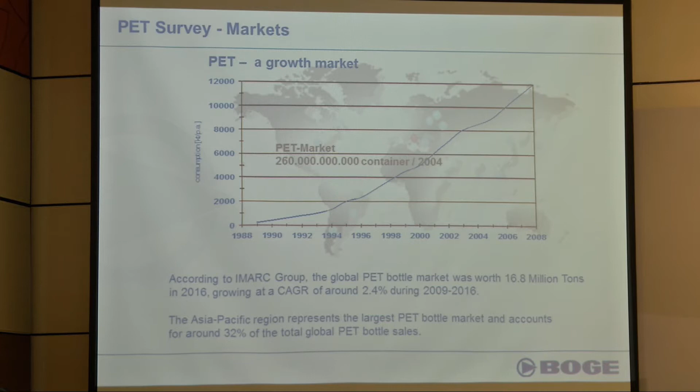What business is PET? Most of you are in the PET industry or supplying material and so on, and it is growing. The compressed air demand for this industry is also growing by 2.4% from 2009 to 2016. The best part is 32% of the total global PET business is from Asia Pacific, so that's where we are - a growing and developing market for PET requirements in Asia Pacific.

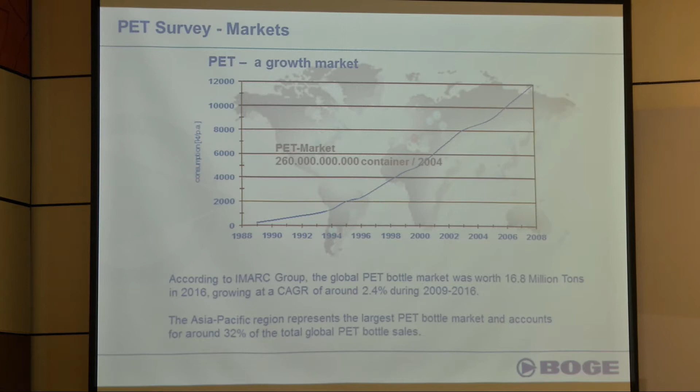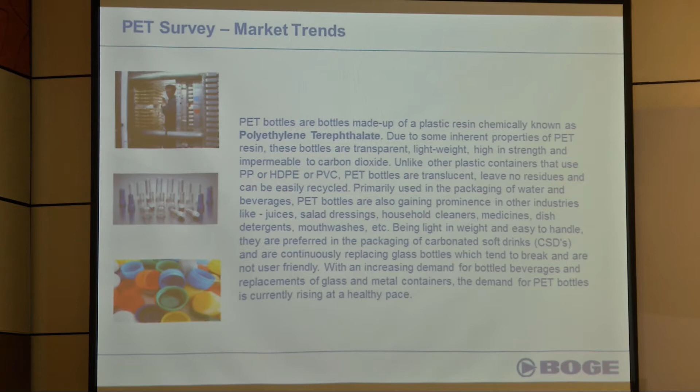Mainly PET bottles are used for all kinds of packaging, like fruit drinks, other soft drinks, beverages, some chemicals, and cooking liquids, because PET bottles are lighter, easy to handle, and easy to recycle. So it's a growing and demanding market.

When it comes to manufacturing, there are a lot of PET bottle manufacturing processes. You get single stage machines, where you manufacture the preform, then blow the bottle, and then it goes to the filling all the way in one line. So this is one kind of industry that you have.

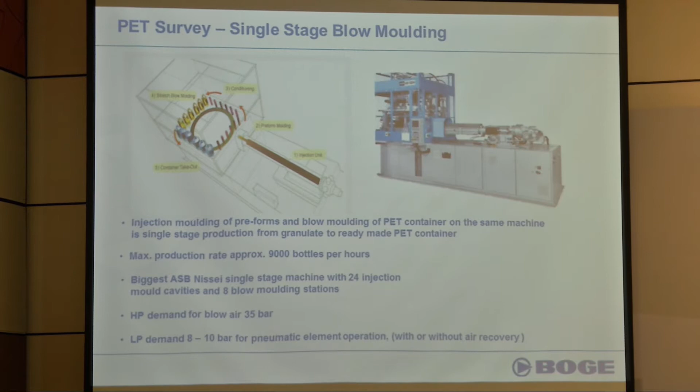Some of the big manufacturers of such machines are ASB and Nissei and so on, and you can go up to about 9,000 bottles per hour of manufacturing. This needs high pressure compressed air of 35 bar basically, and for the low pressure, there is a low pressure requirement as well for the pneumatics to work, so that your plant will do the job.

There are two kinds of pressure applications, and for several years, the 40 bar or 35 bar pressure has just been blown and sent out to the atmosphere. But with the growing demand of energy bills rising up, there was a requirement for recovery of this energy or the compressed air that is blown out to the atmosphere.

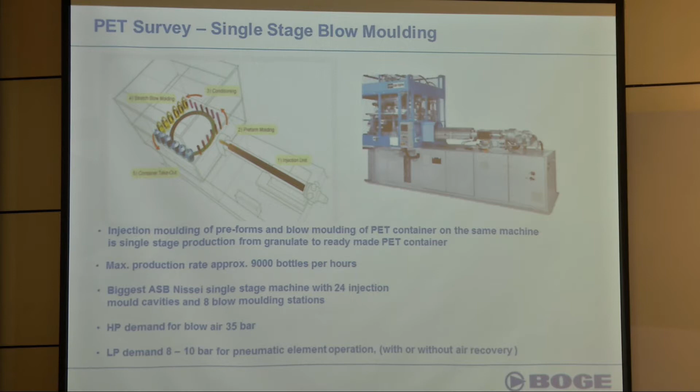So since 5-6 years back, manufacturers of these machines started building compressed air recovery systems - ASR, ARS you call it.

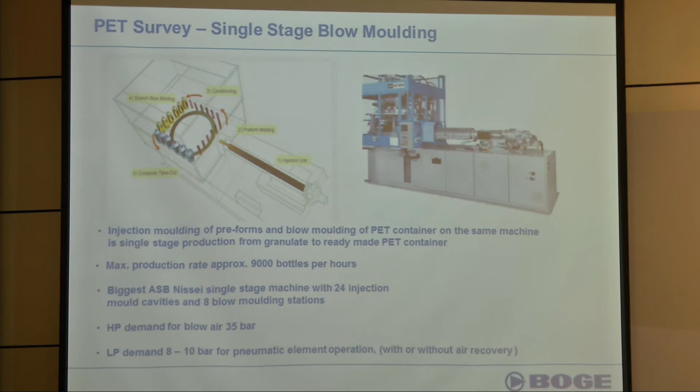What you do is, when you have a rotary system or a linear system, it doesn't matter - the final product is blown at 35 bar, but that energy, the compressed air that is blown at 35 bar, is recovered to do a pre-blowing to the previous bottle that is coming in the line. I hope you can understand it because you recover the... I don't have a slide to show that, but maybe on the next slide I will show you.

This is the final blowing, but it takes the pressure back to the bottle that was blown before, at a lower pressure first, and that air again is used to blow the bottle before that at a lower pressure again. So the final product is blown in 3 stages.

So you can recover the compressed air without sending it back to the atmosphere. Then after the 3rd stage, the 4th level, it goes back to another tank and is used as pneumatic air for 7-8 bar requirement. So this is a better way of blowing bottles or using compressed air rather than sending it outside after you blow at 35 bar. There are machines now built with air recovery systems, which you need to look at when deciding on a plant.

What we would also recommend is the conventional way of blowing PET bottles was using a big compressor which from zero sucks atmospheric air and pressurizes it to 40 bar, and you use that compressed air to blow the bottles.

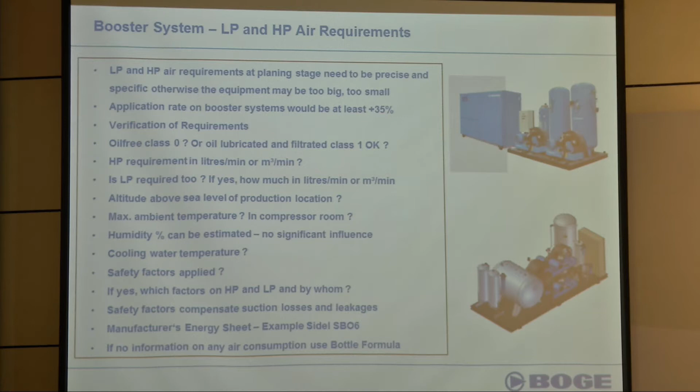But the general norm is, when you start manufacturing bottles, you are not going to manufacture the same kind of bottles every day or the same size. You will keep changing the bottle volume, and you will also change the speed depending on your demand. So when you have a variation in compressed air requirement, it makes no sense to have a very big machine that produces the maximum at one time but is only utilized 50% or 70%.

So it's better to have a modular system to produce bottles rather than one big system that does everything at once. So we came out with a new concept where you can have a modular type system, where compressors have a low pressure system, then it will be boosted to whatever pressure you need.

Whether you want 40 bar, 35 bar, or 26 bar, depending on the kind of bottle you blow and the design you need, you can blow it from 22 bar all the way to 35 bar pressures. So you can have a pre-pressure compressor system, then a booster system where you can boost it to whatever pressure you need.

So before you go into a production plant, as part of the design, you need to ask yourself questions like: what is the low pressure requirement, and whether you want single stage or two stage blowing.

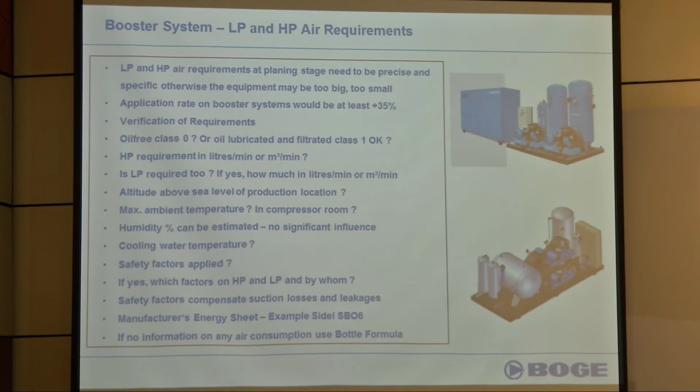Then, what would be the air requirements? This is the biggest question, because generally a lot of consultants or bottle manufacturers will say, I need oil-free air. When you say oil-free, you have to have a benchmark for what you mean by oil-free. Because there's technically oil-free compressed air, or you can get an oil-free compressor system. An oil-free compressor system only means that during the compression stage, you don't use oil.

But the question is, what is happening here in the atmosphere? Because in every plant, you have generators or injection molding machines or other machines producing hydrocarbons going into the atmosphere, like even your vehicles, and in places like Bangkok or around Bangkok, a lot of cars are emitting hydrocarbons into the atmosphere, unburned fuel. So all this is in the atmosphere.

So if you have 1 milligram of hydrocarbons in the atmosphere, when you compress it to 35 bar, that means you are putting 36 meter cubes of ambient air into a tank of 1 meter cube, for example. So if you have 1 milligram of hydrocarbons in atmosphere in a 1 meter cube, in compressed air you will have 36 milligrams of hydrocarbons. So it doesn't matter whether the oil came from the compressor or not, because you already had it in the atmosphere. That's very important: although you have an oil-free compressor, it doesn't mean your product won't get contaminated. So you need to look at the whole process.

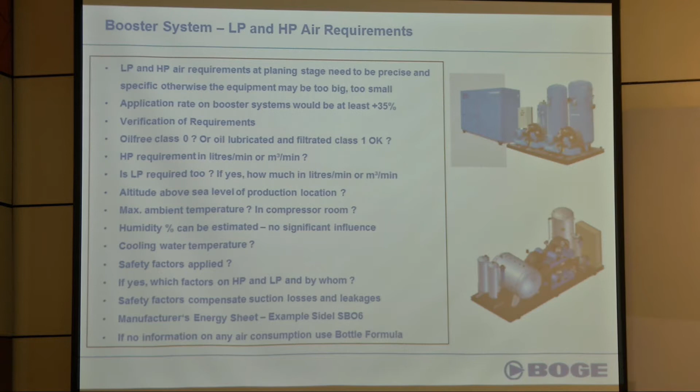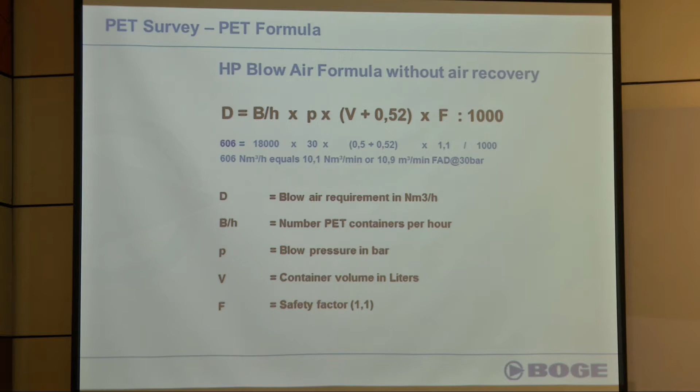If you don't have the equation, here we have the equation that all the bottling manufacturers use, so you can use this calculation to determine the compressed air requirement. You can also see there is a safety factor that we have put, because in case of a preform burst, you're going to lose compressed air, and in case of leakages in the plant, if you don't maintain it, you lose compressed air. So to compensate for all these factors, you need to add at least an additional 10% of compressed air into the plant when you are deciding, so that you don't have starvation when you are doing the production.

The next stage, as I told you, is what is the cleanliness of compressed air that you need, has to be defined according to the ISO 8573 standards. So if you just blindly say oil-free, it doesn't mean 100%, it has a little bit of hydrocarbons, however much purification you do, there's a little bit of hydrocarbons in the air. But what we need to do is have less than what we have in the ambient air, then that is good enough.

So you need to look at what is the solid particle content that you can allow, what is the water content, what is the oil content, and whether you need sterile or not, because there are a lot of microorganisms in the atmosphere that are also going to come in with compressed air. Especially if you're doing what we call hot filling, like if you produce the bottle and immediately fill it up, you need to make sure that there's nothing inside the bottle when you fill up your beverage or whatever the final food product that you're going to fill it in. So this you need to take care of.

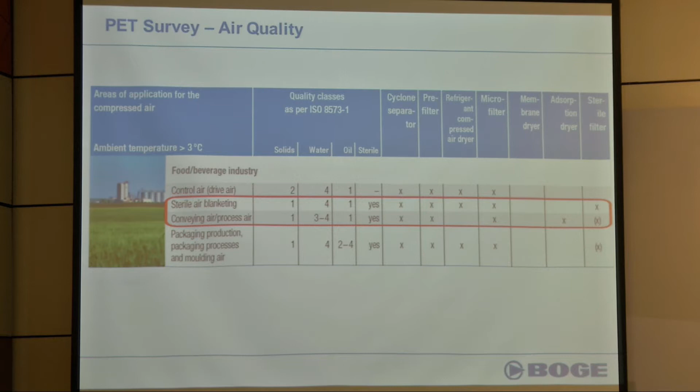So generally the requirement for oil is ISO class 1. The water can be 3 to 4, because you have to be very sure about the clarity of the bottle that you get, because if you have a lot of moisture in it, your bottle will get discolored, so the product will not be as clear as it should be. Solid particles are also important, because when you blow it at a higher pressure, if you have solid particles, they can get stuck into the body because it's very hot.

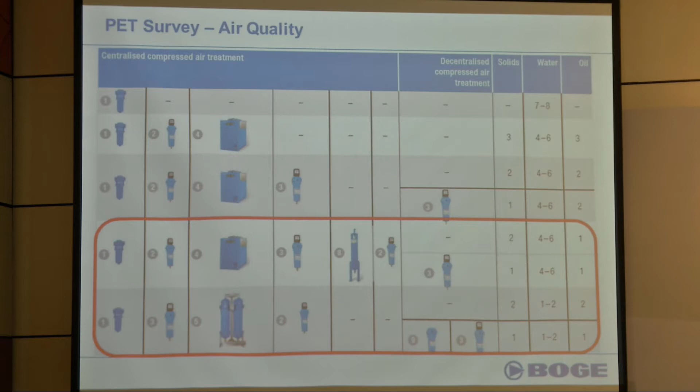So it's not only the compressors, you need to think about what purification equipment you need downstream. For particle removal, you need coalescing filters. Then you have to use either a refrigerant dryer system or an adsorption dryer system, depending on the dew point that you need of the compressed air or the moisture content. Then you also need adsorbers, carbon adsorbers, so that they can take off the hydrocarbons in compressed air, and also the smell. If you have any odor in hydrocarbon smells or whatever smells are there, it gets absorbed by this material.

Then of course, at the last stage, you will need sterile filters, but it's up to you whether you are going to use a sterile filter or not, because when a bottle is blown at over 200 degrees, all the microorganisms get killed. But it depends, end of the day, whether you need to use it or not, depending on the kind of beverage that you are going to fill it up with.

So when you have a basic modular system, you have a pre-pressure compressor system which will go through filtration and purification equipment. It could be an oil-free screw compressor or an oil-lubricated machine, depending on your requirement. Then it goes to low-pressure compressed air tanks, so that you can use this low pressure for your pneumatic applications in other areas of the factory as well. That compressor can be a variable speed driven compressor as well, so that it produces or runs based on the demand in the factory.

Then at the second stage, you can have the high pressure series of boosting, where you can have a modular system again. You can have 1 booster or 10 boosters, or basically it's 4 for each sector.

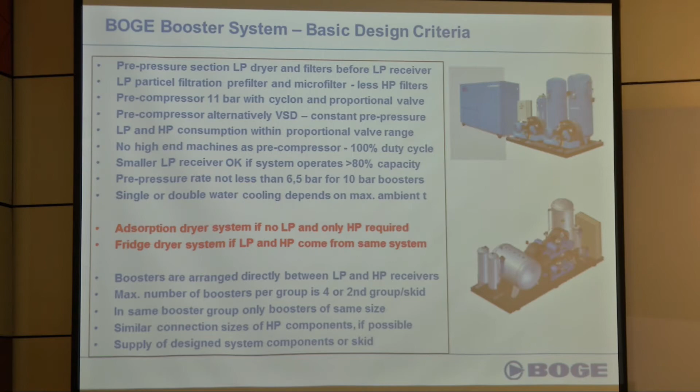These boosters will start and stop only based on demand. One by one, they start and stop depending on your demand and run accordingly. So you save energy widely, so that you don't experience unnecessary electrical usage. End of the day, depending on your production, only the machines that are needed will run.

Here you can choose whether you want oil-free compressed air from the compressor itself, or you can use lubricated compressors and do purification to eliminate everything that is in compressed air. You have two options, because oil-free compressed air systems are generally nearly two or three times the price of oil lubricated systems. But if you use purification systems, you can recover your investment much, much faster.

Also, the other advantage is that in case of a failure in one of the equipment, you can still run part of your production. You don't have to depend on one big plant because it's a modular system.

Some will need special requirements, like water cooling systems if needed for cooling, and skid mounting systems. All these are available in the market now with modular systems, so you don't have to worry about how you design your plant. You just need to give the suppliers the requirement, and they will create the modular system that is required.

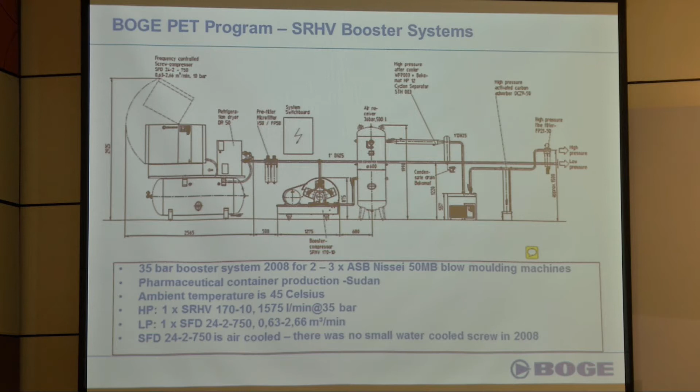This is a bigger system, designed for 45 degrees Celsius ambient, like in the Middle Eastern areas. It produces 1,500 liters per minute of 35 bar compressed air.

Here again it goes through the same filtration processes and tanks, going to the system where you can use it.

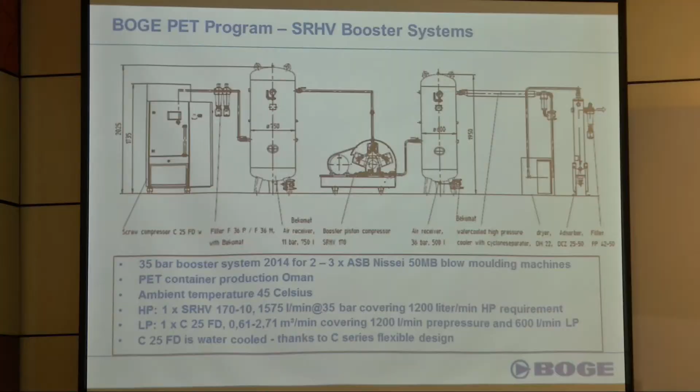In a high ambient situation, during different stages of compression the temperature rises up. At the boosting stages it will rise to 80 degrees. Most of the time, 80 degrees is not good for your production or your distribution system.

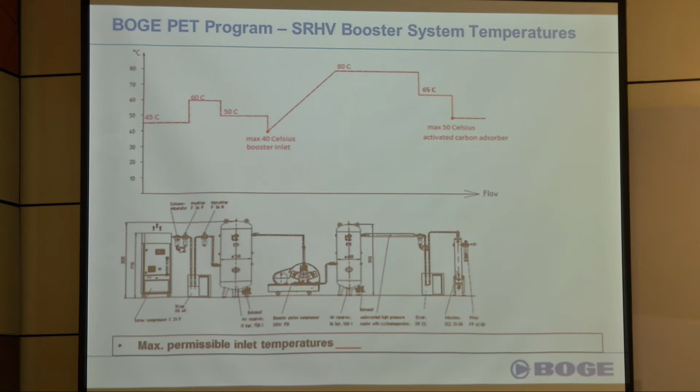So we can bring down the temperatures using aftercoolers as well as refrigerant cycles, so that it reaches usable temperature levels. But of course, when you're blowing PET bottles, you can afford higher temperatures, because the preforms are heated during the process anyway.

On a bigger system, it's the same. These are just sample photographs for you to understand the modular system.

You can start from the compressed air demand. If you have from 1.5 meter cubes up to 18 meter cubes, you can have a basic fixed standard system with two-stage compression, and the pre-pressure compressor has to be 10 or 5 bar pre-pressure for the boosters.

You can have frequency control machines so that you have a modular operating system where you can save some energy. Then you have fridge dryers or adsorption dryers to take off the moisture from the compressed air that you need.

If you want class 1 air quality in the compressed air, you have to have an adsorber, because like I said earlier, you can have a total oil-free compressed air system, but if you have 1 milligram of hydrocarbons outside in the atmosphere, it goes into the compressed air and becomes a much higher volume.

On an oil lubricated compressor, the oil content in compressed air will be 3 milligrams per meter cube. But if you have 1 milligram outside on an oil-free system, you will have 10 times more, because during compression you make the bigger volume into a smaller volume. So 10 bar pressurizing means it puts 11 atmospherics to make 10 bar pressure.

On an oil lubricated screw compressor system, you have a built-in separation element, an oil separating element, which will capture all the oil inside and only let 3 milligrams go out. But on an oil-free system, there is no separation element inside, so whatever was in the atmosphere will be 10 times in the system itself.

Worst scenario, you get big piston type compressors which are oil free, and those will pressurize from 0 atmosphere to 35 bar. That means 36 times the volume. So on an oil free piston system, you get 36 times the oil that's in the atmosphere. On a booster system, you can only add 10 or 11 times. So it's easier to purify the oil content from a booster system rather than a 0 to 35 bar pressurizing system, which was earlier used in the market.

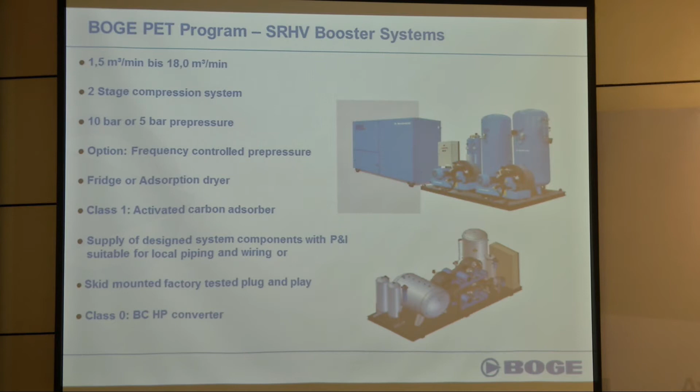The catalyzer has a certain material that will break the hydrocarbon chain into water and carbon dioxide. These catalyzers are also available in high pressure versions, up to 45 bar, to break the hydrocarbon oil chain into water and carbon dioxide. It produces pure distilled water as a byproduct, so all the hydrocarbons will be broken down and no longer in the compressed air. But still, the ISO class 0 standard allows 0.002 milligrams of hydrocarbons per cubic meter, so it's not 100% anyway.

The flexible solutions depend on the location of production. Most big machines will have problems at high altitudes, but it doesn't matter when you have modular systems. It's easy to calculate for high ambient or high elevation conditions, and you can create machines suitable for them. It's cheaper and more economical to make smaller compressors suitable for high ambient temperatures.

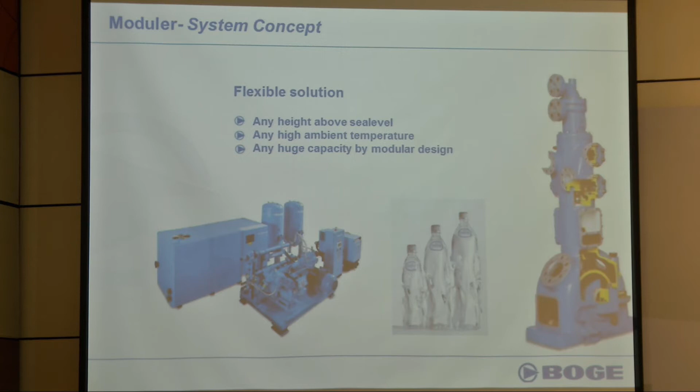But with a modular system, you might need half the floor space because you can stack units on top of each other in different structures. Any capacity can be met with multiple compressors rather than one, because with a single compressor system you need a backup, meaning double the space and double the investment. Here you only need maybe a tenth of your system as a spare, which is more economical.

It's also less energy consuming because it's 4-stage compression rather than one stage, making it an easier way of compression.

Maintenance-wise, it's much cheaper. In some countries like Indonesia, and partly Thailand, where they use modular systems, rather than doing a full maintenance or overhaul, they just take out a small piece and throw it away, replacing it with a new one, which takes only half an hour or half a day. It's more economical to throw away a smaller component and replace it with a new one, since you get another year of warranty and similar benefits.

With compressed air, bigger machines are of course very noisy, but modular systems are much quieter, and you don't need special foundations or special rooms for installation. There's less vibration, and all pollution controls can be met.

It's a heavy duty design, so you can run 24/7 with no problem. The components have a longer lifetime, and it's easy to replace a component because it's smaller and easier to handle.

No contamination. You can get it in water-cooled or air-cooled versions. The machines don't depend on atmospheric conditions, because if you have proper filtration systems installed, you can eliminate all the harmful hydrocarbons and contaminants in the system as well.

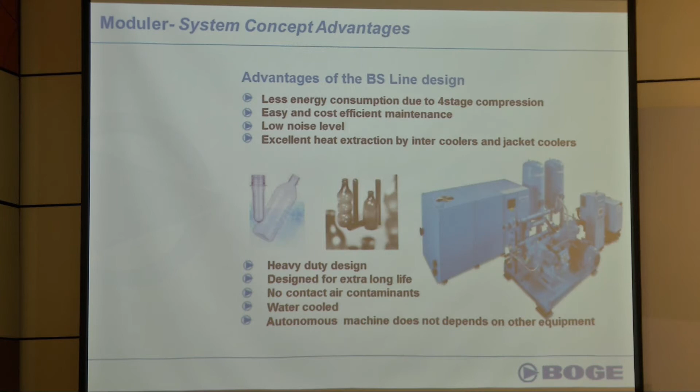So this is a modular design installation. This is an oil-free system, totally oil-free. You can see the pre-pressure compressors and also the boosting compressors, totally oil-free from the compressor itself, if that was a requirement. And it's frequency controlled, and starting and stopping depends on the demand, so there's a lot of energy saving as well.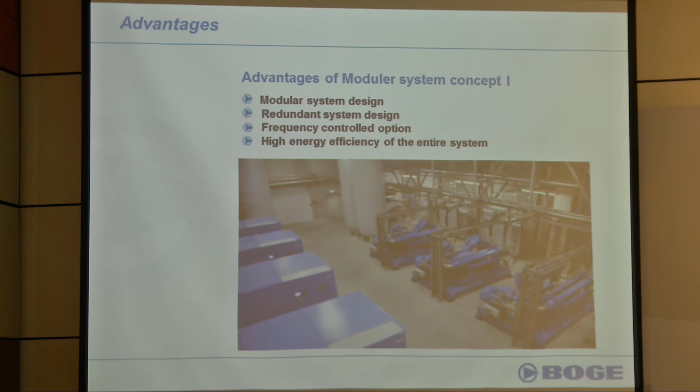Yeah, so I'm not really sure whether I ran it very fast. So if you have any questions, please feel free to throw them at me, I think we have another 10 minutes.

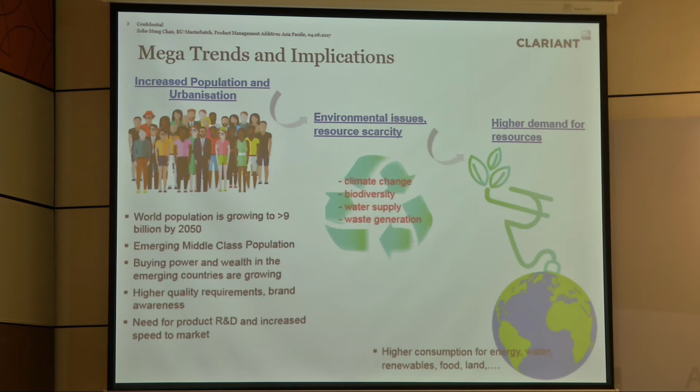So this will lead to environmental issues and resource scarcity. All this topic is not new to everyone - climate change, biodiversity, water supply, and waste generation is a result of higher world populations. Because of this, there's high demand for resources. We keep talking about green, we have higher energy consumption, water consumption, and renewable food. All this topic is not new anymore, it's getting more and more.

This is through all the experience we have in Clariant. We have been working with brand owners, helping them to do color trending, what is coming up next. So they are very curious to work with us. We have a department called ColorWorks - this is the department that interacts a lot with the brand owners.

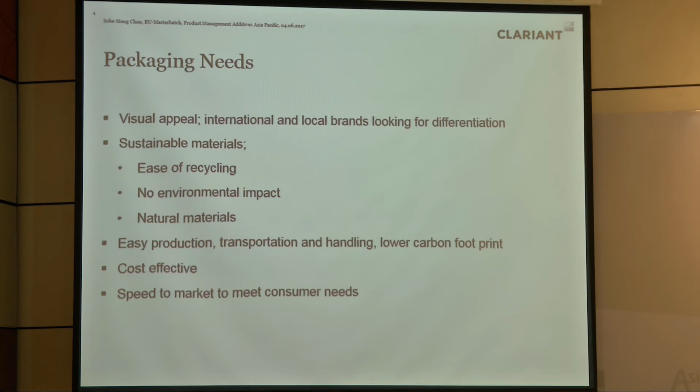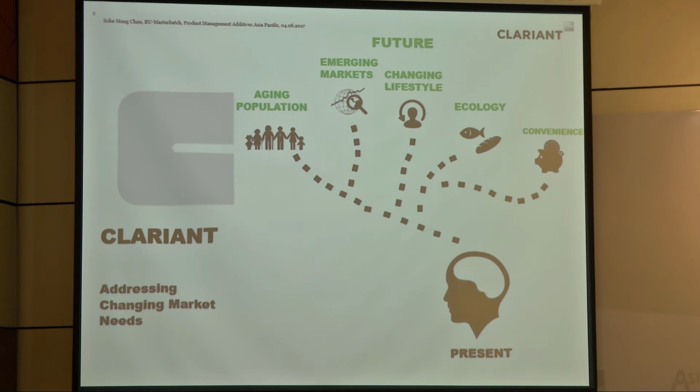So next, I would like to share with you a video. The product we have displayed at the back is called Hydrocerol. It's a chemical foaming additive. So the video will tell you the story behind it. Hopefully it works.

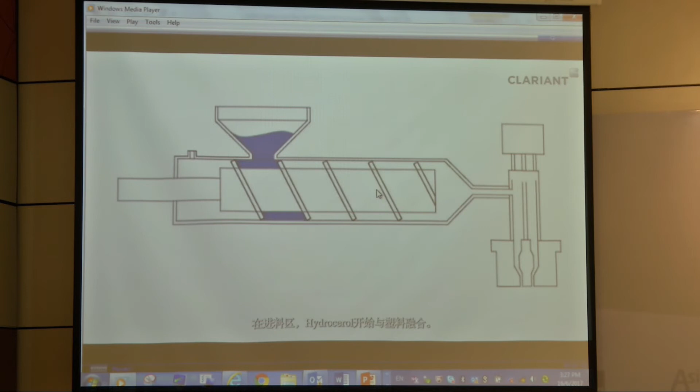Welcome to Clariant's Hydrocerol for Extrusion Blow Molding Application Tutorial Video. The working principle of Hydrocerol: as it is a chemical foaming agent, you simply need to mix it with HDPE resin and put into the hopper. At the feeding zone, Hydrocerol starts mixing with plastic. At the melting zone, it decomposes under heat and releases CO2 gas in the polymer. At the mixing zone, gas forms into fine-sized bubbles and distributes themselves into plastic melt to form a cell structure. When the cell structure becomes solid, you will have less density material.

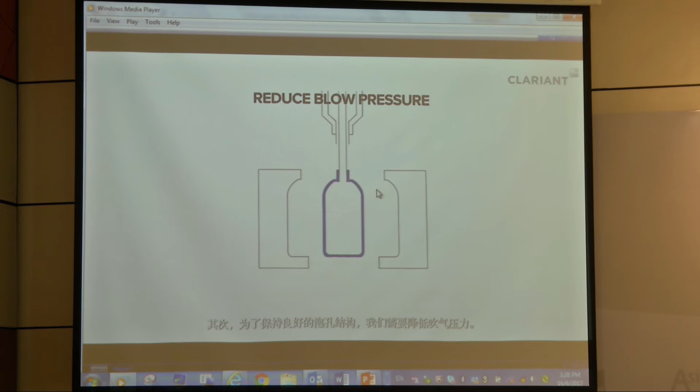Secondly, to keep a good cell structure, you will need to reduce the blow pressure. If the blow pressure is too high, you will crush the bubble. Finally, since the material is swelling after the die head, some parts of the bottle will become very thick. At that time, you can adjust the Parison program to make the bottle wall even.

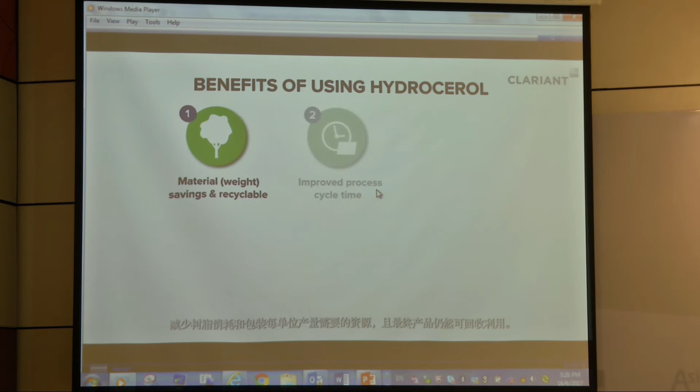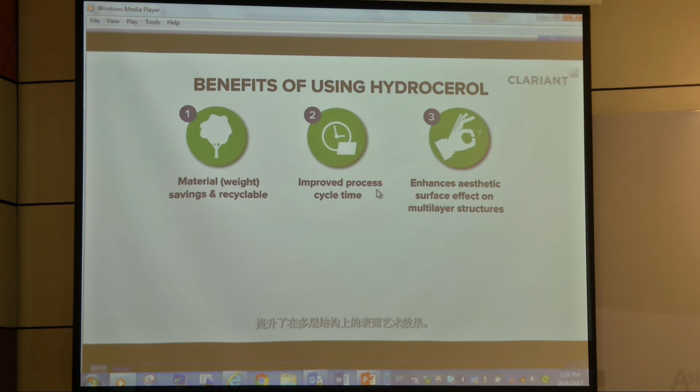One of the obvious benefits for you in using Hydrocerol is less resin consumption due to an up to 10% lighter bottle. These are the following benefits when using our Hydrocerol technology: it helps you lower resin consumption, reduces packaging resources needed per unit produced. The end article remains recyclable. It improves the cycle time, which lowers the cost of the part to enable broader access and affordability. It enhances the aesthetic surface effect on multi-layer structures to reduce fuel consumption and costs in distribution logistics. Finally, the grade used is approved for food contact application.

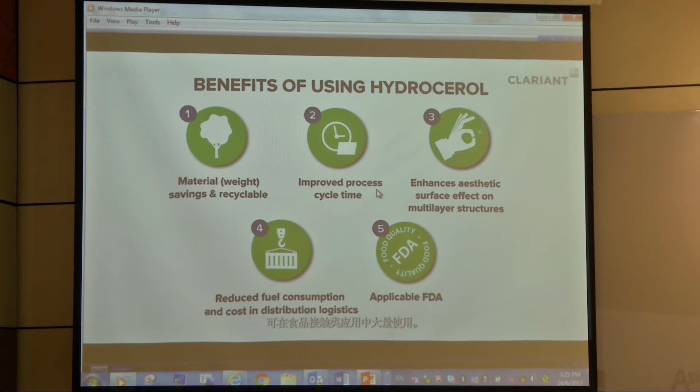Our Hydrocerol technology enables you to have a sustainable solution for your packaging needs.

The story about Hydrocerol, a chemical foaming additive. How does it work and how does it contribute to sustainability? So Nalin, I think you understand where I come from with my questions. Yeah. So what is Hydrocerol? So it's a chemical foaming agent.

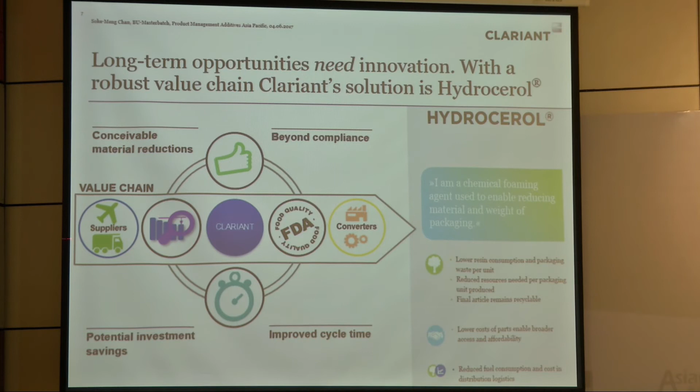Just now I talked about all this mega trend and also the market need, and we take all this into consideration, the needs from the value chain. What happened in the value chain? They want to have less raw material usage, better cost efficiency, and all this is captured here. So conceivable material reduction is one of the benefits because of the foaming effect. Less material is needed to produce the same type of bottle, and it has FDA approval. So this is beneficial for the consumer. For the converter, they are looking into cycle time reductions, and overall there's also potential investment saving.

So for Hydrocerol, chemical foaming agent, it can be used in different polymer processes. It's very easy to use, usually in bottle production or packaging container production, whether using EBM or ISBM. There's usually a feeding hopper to handle the resin and also color master batches. So this CFA master batch, chemical foaming master batch Hydrocerol, can be dosed in the same way by blending with the polymer using the same feeding system, or using a side feeder system to feed into the extruder. So upon handling the extruder, the reaction will take place here.

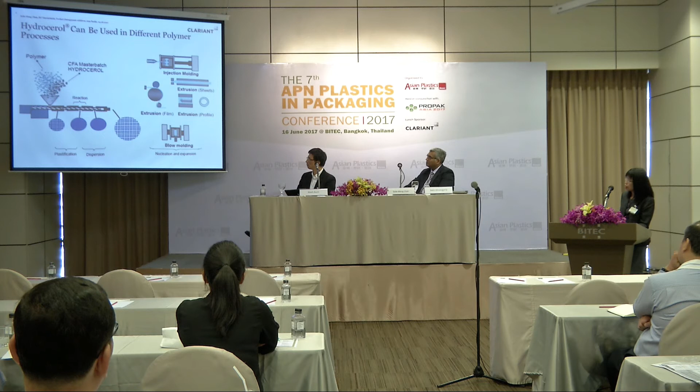So you start with the plastification and then dispersion and then end up with a foam product. This product can be used in injection molding, different kinds of extrusion, sheet extrusion, film extrusion, profile extrusion. I have some samples there showing you all kinds of things that can be foamed using this product. And of course, blow molding. So in fact, it's not just a blowing agent because it's also a nucleation agent and also expands the plastic during the process.

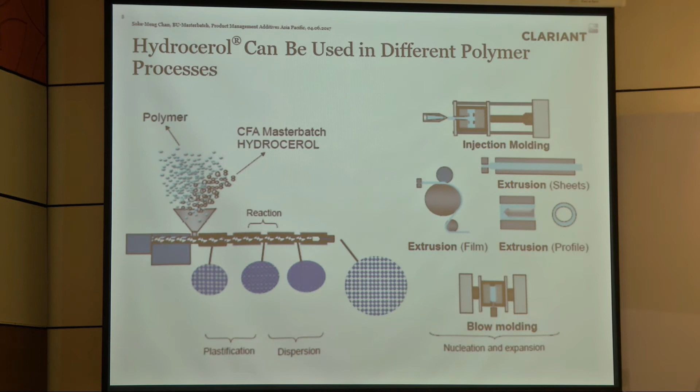So using this solution, we have a lot of experience. Hydrocerol contributes to our sustainability goals, and potentially this is your solution too. It can be recycled easily.

After decomposition, this CFA will become CO2 and water plus some inorganic material. It's something like what we are using in the kitchen during baking. I do baking every weekend because I'm making my own cakes and my own bread. It's the same concept.

It's safe to be used, has FDA compliance, so no worry when you are going to use a bottle to contain food or whatever. The chemical reaction is very simple, and this inorganic material is very stable.

In fact, it's very fine particles which can be used as a nucleating agent in further processing. Because a lot of people worry that after foaming and less material is used, it may become softer. But this can be compensated by the inorganic material present, which acts as a nucleating agent that overcomes this shortage in stiffness.

If there's unreacted CFA in the regrind, it may cause some irregularity in the extrusion process, meaning the bottle will not look nice. All this needs some adjustment during the machine setup, but after a few rounds of trial, once customers understand the concept, they are able to handle everything by themselves.

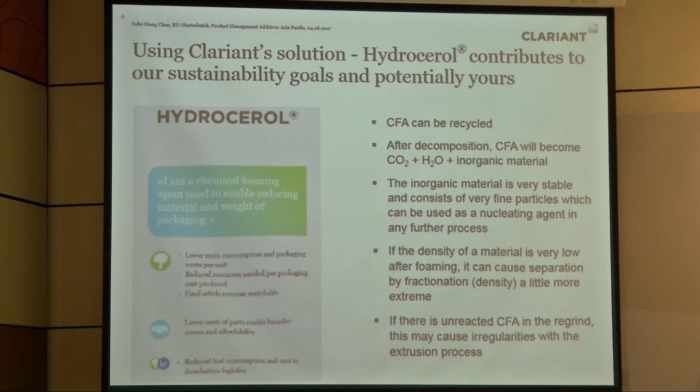So where is our focus area? As I said, it can be used to foam all kinds of things. We take into consideration market needs: reducing packaging complexity, using less energy, because when less material is used, less energy is needed for cooling down the plastic during processing, prolonging shelf-life of goods, and reducing material wastage. All this is covered, and it's easy to be recycled.

These are the market segments whereby we have successful cases. Example: health and nutrition, yogurt cups, noodle pots, and toiletry and cosmetic, we have jars and bottles. We have some bottles showcased at the back. And industrial packaging: pails, drums, and jerry cans, and industrial and food packaging, example containers and lubricant oil containers and bottles. All this has been tried at customers with great success.

Some of them are in the process of commercializing, and some are already available on the shelf. In fact, some emerging countries are moving faster than developed countries. The local brands are aware they need to move faster and faster to differentiate themselves.

Probably some of you are familiar with physical foaming. I'll also make a comparison here. What is chemical foaming as compared to physical foaming? In terms of the process, chemical foaming, as I mentioned, uses a chemical foaming agent, a chemistry that decomposes into gaseous components like CO2 and water, etc.

It's used like an additive as a nucleating agent. The dosing is very easy, just mix with the polymer or use a side feeder to feed into the extruder. It's available in different forms, microgranular or standard granular size, same as the polymer pellet. Generally there's no investment needed because you can use existing machinery to handle this product. Different processing methods, extrusion or injection molding, can be used, and it's not flammable or toxic. So this is chemical foaming agent.

This is a schematic diagram. Just blend the two raw materials together or use side feeding into the extruder, and at the end you get foam articles.

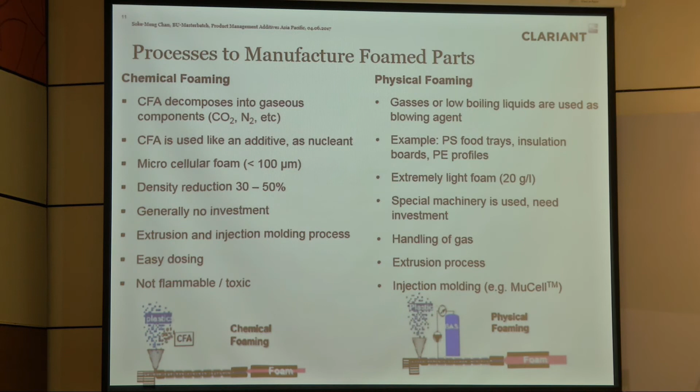Whereas in physical foaming, gases or low boiling liquids are used as a blowing agent, meaning you need to inject gases or low boiling liquids. Examples you can see nowadays in the market are food trays made of polystyrene, insulation boards, PE profile. You can make extremely light foam as well. However, in this case, special machinery is used.

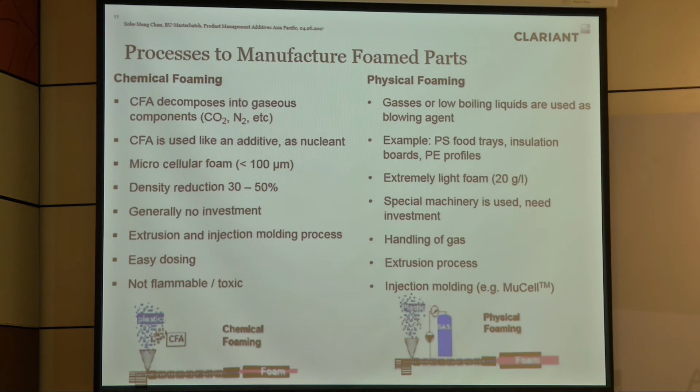In some factories with space constraints, especially in developed countries, factory space rental is very costly. So you need this gadget to handle all these low boiling liquids or gases to be injected into the extruder. It involves handling of gases, and the extrusion and injection molding processes are the same, but there's additional investment, and space is needed to install this machinery next to the extruder for extrusion and injection molding. One such technology is called MuCell technology.

So let's compare the summary, what I have just talked about, the pros and cons. Foaming agent is a solid substance, just like powder or granules, like polyethylene or polypropylene granules, same kind of form.

It's based on the decomposition in the extruder into CO2 and water. It's based on common machinery, easy dosing, and this is a benefit. As compared to physical foaming, you need to handle gases like N2, CO2, butane, and the foaming agent is injected as a fluid into the extruder. That requires some handling, so there will be higher gas loading as compared to here, where it happens in situ in the extruder. So this could be one of the plus points.

However, in terms of cost and machinery, this has no additional investment. It's just an ongoing cost on the existing machine you are using. The machinery investment part is different for physical foaming - it involves complex machinery, needs space to install, and there will be a quite significant amount of initial investment.

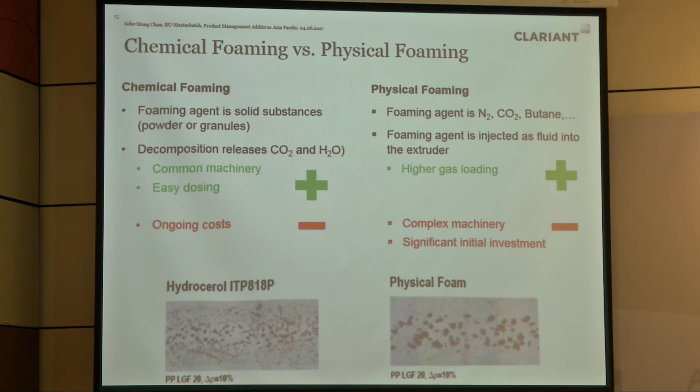So maybe let's look into some number calculations. In this example, the general bottle applications are based on this polymer, Marlex HDPE blow molding resin. Usually 1% master batch is used in this case, to produce this white bottle. On top, they just put additional our product Hydrocerol 2225, dosed at 1% - this is just like a master batch. So they use a shuttle blow molding machine, setting at this profile.

So the end result is this is a successful finding. There's a weight reduction in this case by using 1%, from 23 grams to 20 grams for the bottle weight, so there's a 12% weight reduction. In terms of cycle time, because less material is being used, the cooling time becomes shorter, so the cycle time becomes 16% shorter. And because this chemical is not just a foaming agent, it's also a nucleating agent, it passed the drop test, and also no leakages have been found.

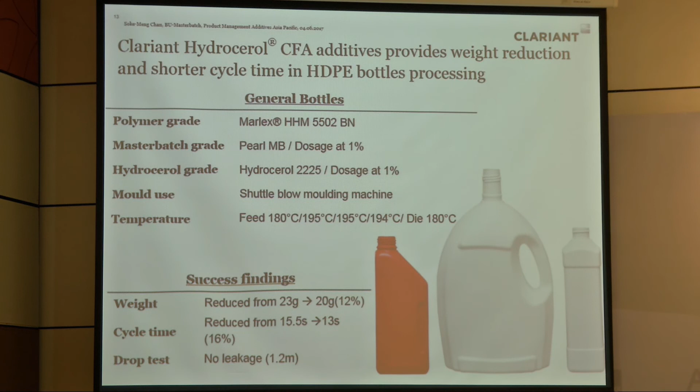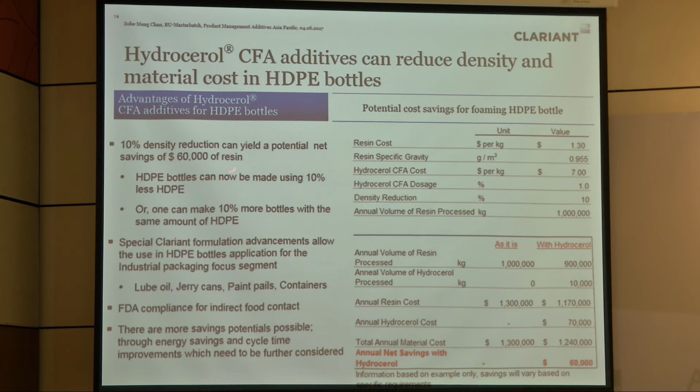So the next slide is talking about some numbers in terms of cost benefit. In this case, using HDPE resin again, and using 1% of Hydrocerol, you have 10% density reduction. All these are based on actual trials on the customer's machine.

For example, a market price of HDPE is $1.30, and this is just an example of CFA cost, because we have different grades - different grades will have different pricing. Let's say in the customer's plant, they are using 1,000 tons of polymer per annum. With 10% weight saving, they will use less polymer - that's a 10% weight reduction. So if no chemical foaming agent is used, the raw material cost is 1.3 million US dollars.

Of course, chemical foaming agent is not free, they have to pay for it. Even though they pay this amount of money, 70,000 US dollars for the chemical foaming agent, at the end this is the net amount they are paying. So annually, there's a saving of 60,000 US dollars for the customer.

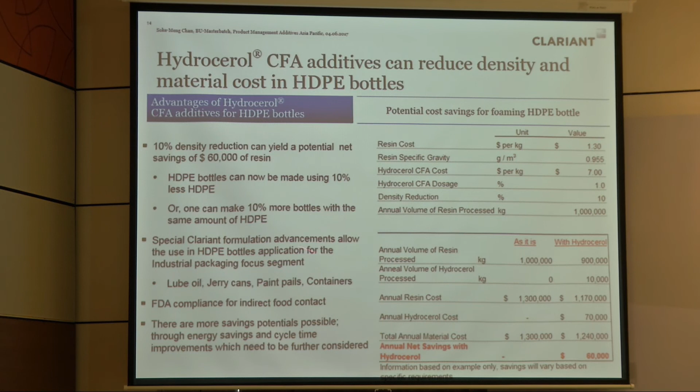In other words, there's a weight reduction, and it's easy for handling because less material is being used. They do not have to keep so much inventory, and also it's easy because the bottles become lighter, easy for transportation. And more importantly, all this has FDA compliance, and also cycle time reduction.

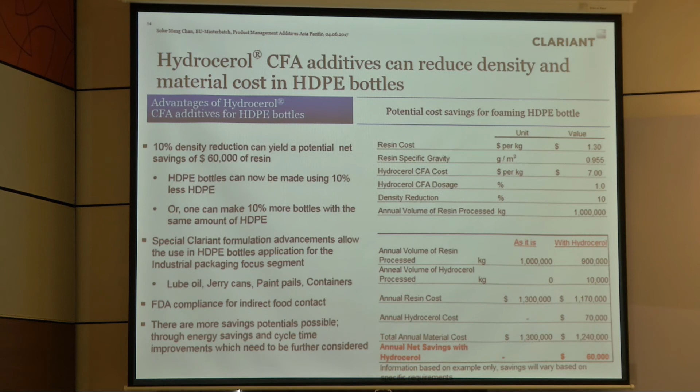If we look at productivity, the cycle time becomes shorter, meaning they can produce more bottles in an 8-hour production shift. So there are two benefits here in terms of money and productivity. This is a sustainable solution.

Let's talk about sustainability. Clariant is actually quite successful in sustainability. I think we are in the 3rd year in top ranking of the Dow Jones Sustainability Index. It's not easy to get there, but we have been successful and we are proud of it.

With this, we confirm that we are committed to product development, customer service and support, and procurement in sustainability. So it's a very important demonstration that we are very committed to sustainability, and this product, Hydrocerol, is a way that we can demonstrate that we have a sustainable solution for the packaging industry.